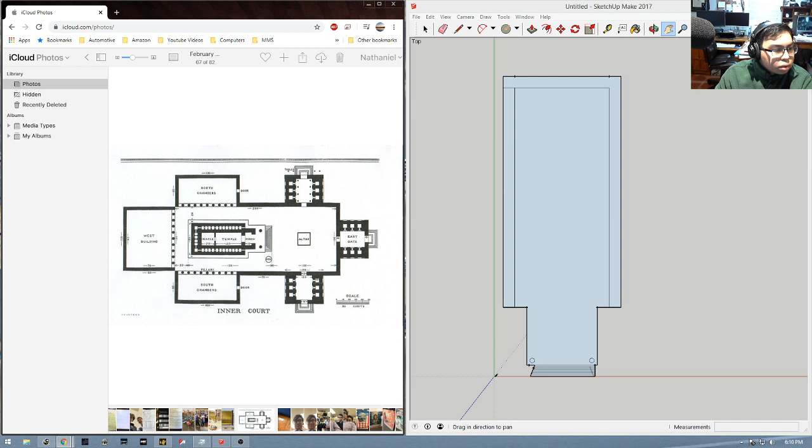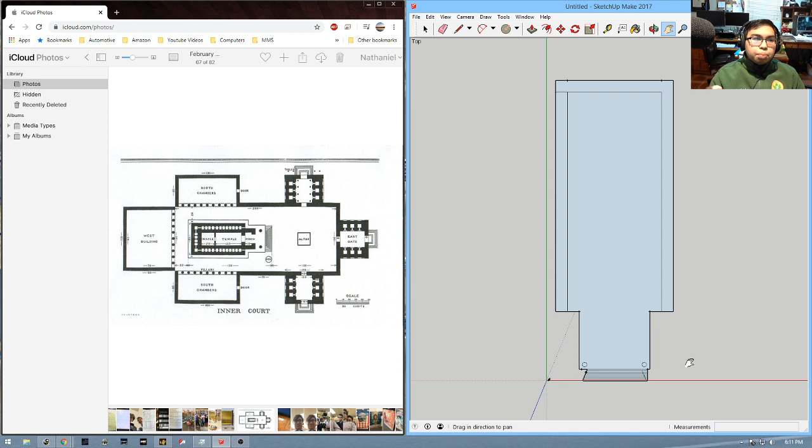Right now we have the current basic layout that I'm using for my model. You can see we're actually pretty far in the process of getting the basic blueprint out, so it really depends on where you stand on your model right now.

It also depends on how much you know about SketchUp and some other stuff. So let's start there. SketchUp is a very easy program to understand and comprehend, which means it won't take that long for you to get to grips with it, and once you do, it's pretty easy to do.

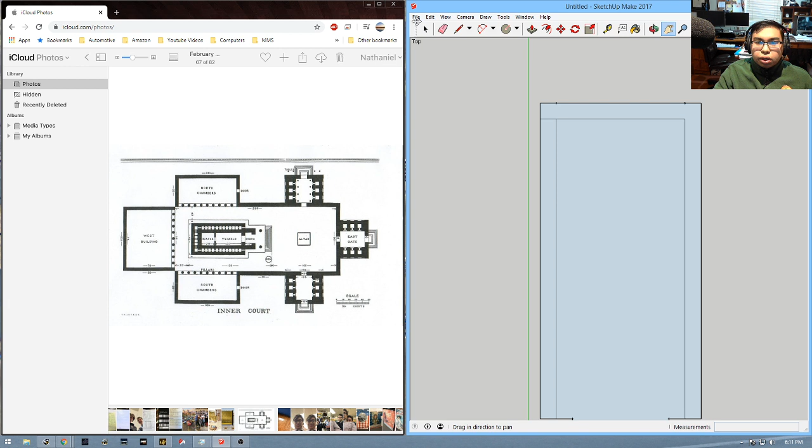What we want to do is get a little bit familiar with our controls first. When you start off with any new document or layout, I'll create a new one for us so we can start from scratch.

When you open up SketchUp, if you're using SketchUp Web, which is the program you're probably going to be using for this class, it's going to look a little different. Don't worry about that—the controls have just been moved to this side and to this side. Otherwise it's stayed pretty much the same.

Okay, so we have this. This is our blueprint that we're going to use to understand how to build it. We're only interested in this small section here where my mouse is scrolling. I'm not sure if you can read the measurements, but I can, so we need to convert this from cubits to inches, into feet, which isn't that difficult.

And then after that, we need to start laying out the blueprint.

First, let's get familiar with our camera controls. On SketchUp Web, you'll get a button on the far bottom left that looks like this, with a rotational orbit look. If you click that and use your mouse button, you can scroll around and look around in your 3D environment. It's very helpful, very handy.

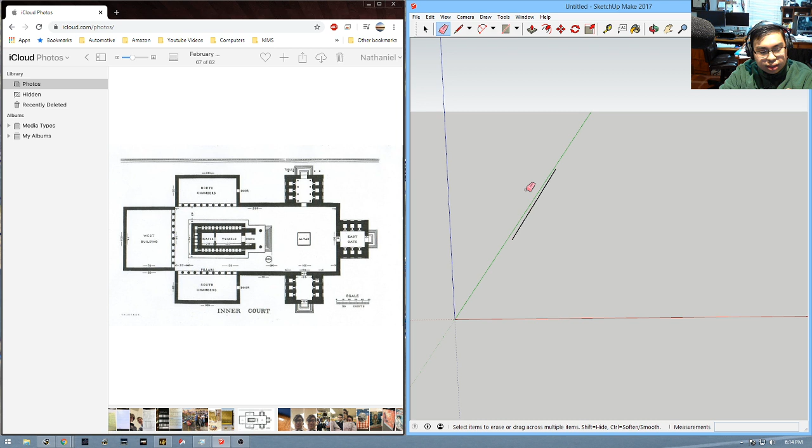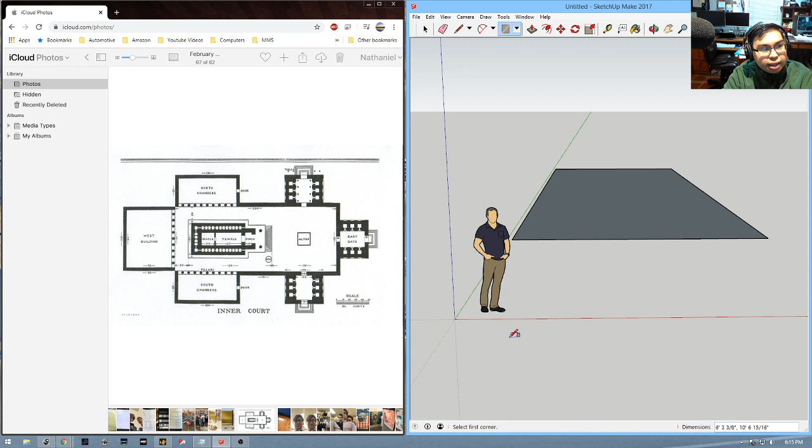Also know that there are commands you can use on the keyboard to make things quicker and easier. For example, if you need to jump to the rectangle or shape builder immediately, just press R on the keyboard, and you can see it jump to that tool so I can build shapes again. Press Control+Z to remove something, or Command+Z on Mac—press it like this and it'll erase the thing immediately.

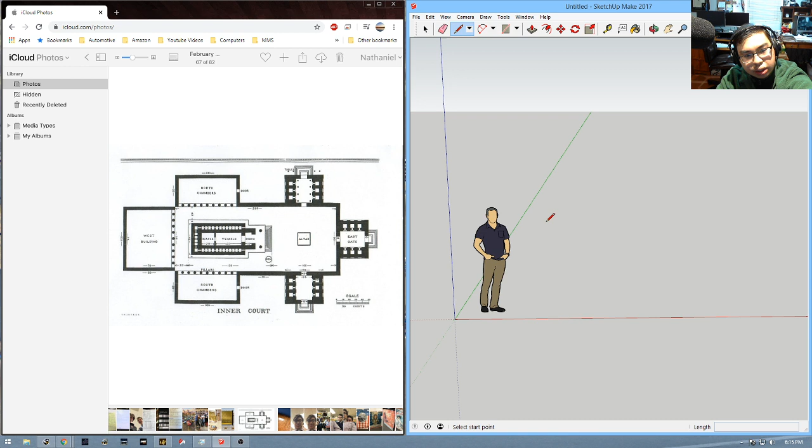Now we're going to start building the temple. How does that work? We're going to press the line button, or press L on the keyboard. Now let's look at what we have here. Let's pull up a calculator just to make our lives a little easier, and we're going to show you what needs to happen.

It says right here that from end to end, using these references from the end of the actual building to the beginning of the building itself, it is 130 cubits long. So if it's 130 cubits long, we multiply 130 times 18 inches to get the measurement in inches. We know that 130 cubits is 2,340 inches long. Then we divide that by 12 to get the foot measurement, and we get 195. So we know that's going to be 195 feet long, and that is the length of the building itself.

So what we'll do now is close that and open this up. I do not remember how it works in SketchUp Make, but I think there's a feature where you just go to Camera, Standard Views, Top, and that gives us a top perspective view of the model. Excuse me a sec. Hold on. Better. And we are going to use the pan tool, and we're just going to zoom out a little bit.

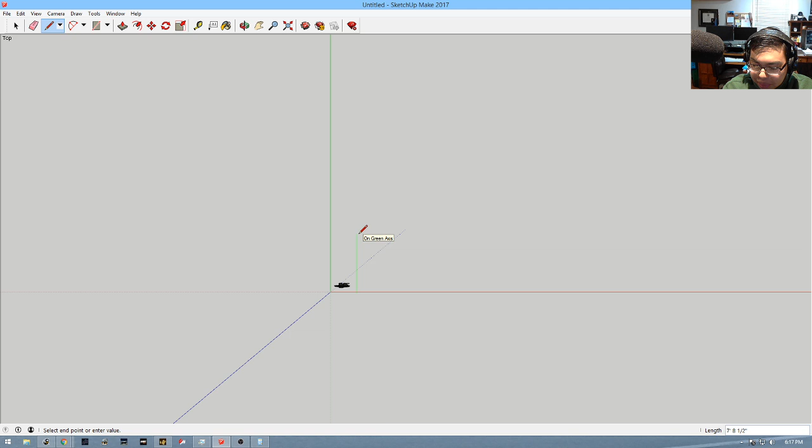Now, by doing so, we'll take the line tool and start on this red line here, which is your x-axis. Click where you want to start, and you'll see this green line occurs. It says on green axis, and on the bottom right there's a thing that says length. What you want to do is go to your keyboard and enter the foot measurement into this length field. It'll do that automatically once you enter keys.

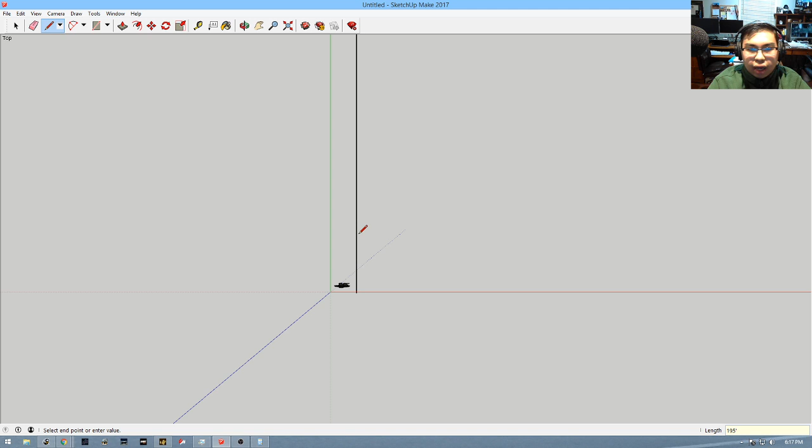So you just press 195, and for feet, we use a single quotation mark, and click enter. Right there, it builds you your first line, and as you can see, it's 195 feet. So that's your first thing.

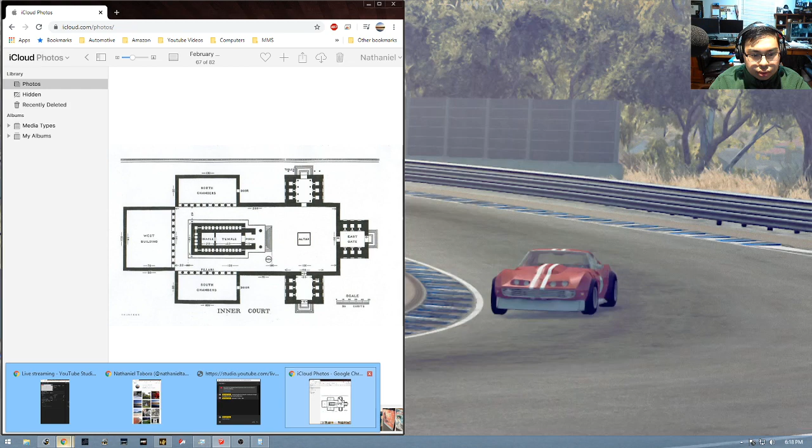Now we need to find out how wide the building is. So we're going to go back to our model here, pull this up, and we see here that the measurement they give is 50 cubits long. Again, if we pull the calculator and clear that out, we do 50 times 18, 900 divided by 12, that gives us 75 feet. So we know that it's going to be 75 feet wide.

Go back into SketchUp, and from here we're going to go to the top of the line you drew there. It says endpoint. It'll mark it like that, then draw onto the red axis, and you enter 75 feet like that. It's very, very simple to do.

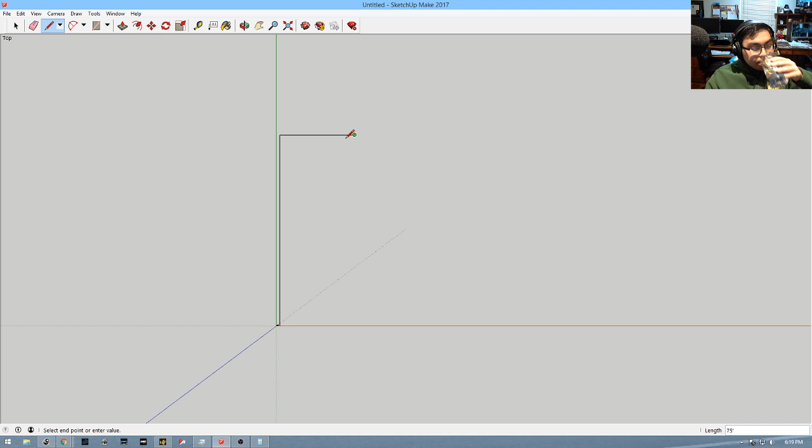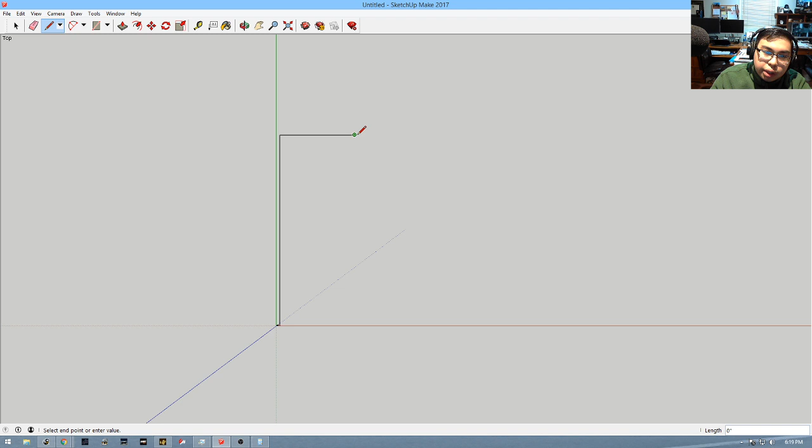Okay, so while I'm waiting on that response, we're going to continue. Since we just need to make a square, like the first primary square here, you can see that this shape was a rectangle and then bits of it were shaved off. It's very simple. So what we're going to do is just make the initial square. We'll go back into SketchUp and finish the polygon, and you'll see that it'll snap to grid, which is great. That's what you want.

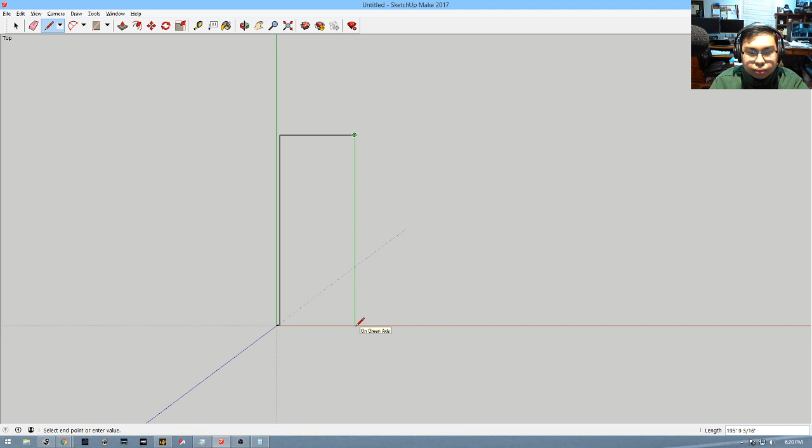Also, if you want to cancel the thing you're doing, say you click something and you don't want to do it, what you can do is just press the escape key on your keyboard and it will cancel that command for you.

That's very helpful. So what I'm going to do is zoom back in here, and we're going to click the endpoint there and just drag it, and it's going to tell me now that it's from point. So you want to click it from point, and there we go. That's our first rectangle, or bit of the 3D model that we need done. Excuse me a second.

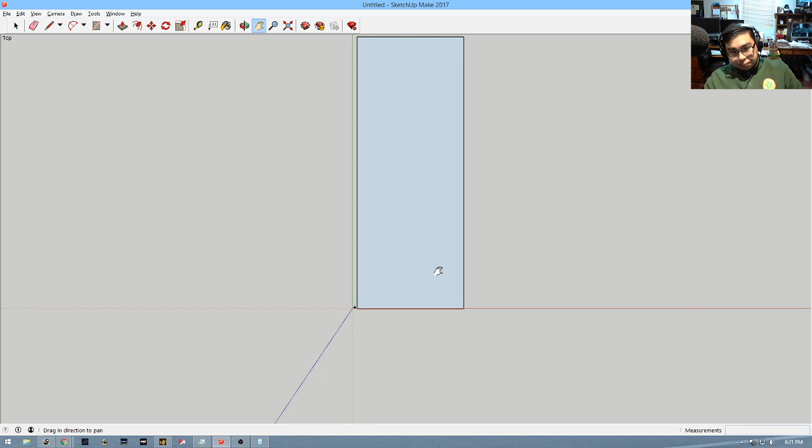Okay, now since we have made our first polygon in the model, we can take a look at what we are doing. Remember, this is from the top view. If we want to look at how it looks right now from a 3D perspective, you can see it really is just a very large rectangle. But from this, we're going to build the temple, and that's what's brilliant about this whole thing.

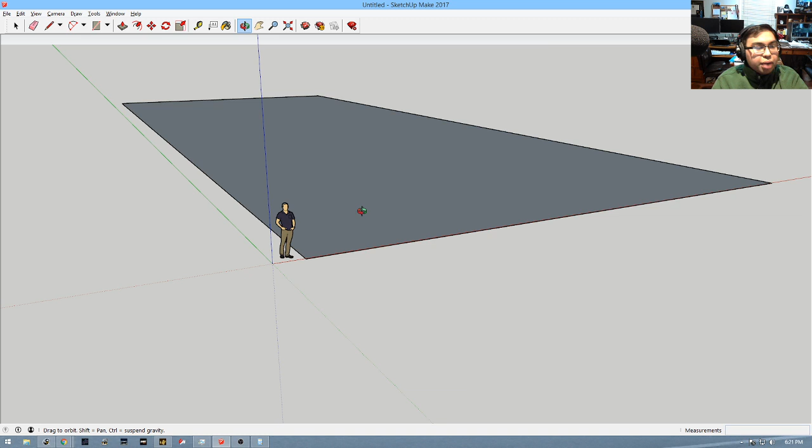So we're just going to go back to camera, standard views top, zoom back out, pan a little bit so we get a better view.

Now what we need to do is take a look at how thick the walls are in and around the actual temple itself. So we go back to our 3D blueprint here, and we can see there's an outline where it is wall or the outer perimeter, and that's going to be most helpful when we are making the walls, as well as finalizing the rest of the model itself.

So what we can see here is that, roughly, this is about 5 cubits thick. From what I can make out there, that is a 5, showing us how thick the wall is. So we know it's going to be 5 cubits. That's how many cubits we're going to need.

So let's go back into SketchUp, pull the calculator up, and calculate how much that is in inches. So 5 times 18 divided by 12 gets us 7.5 feet.

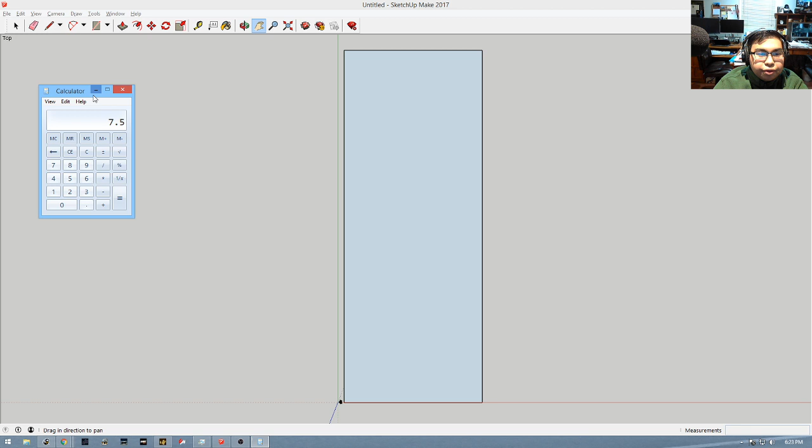So there's a feature in SketchUp which is very helpful that we're going to use to help us measure the walls. It's called the measuring tape. Right here it's the measuring tape tool, you'll see it in SketchUp Web when you use it. We're going to click it, and this allows us to measure and make lines without actually setting them in the model itself.

That becomes very helpful as the model becomes more advanced, because the more lines you draw, the more polygons you make, and if you make a wrong polygon, things are going to go horribly wrong horribly quick. So we use the measuring tape tool to help prevent that and still get measurements and starting points to allow us to model.

So what we'll do here is start from the point, from the very top end point here. We'll assume this is the back, considering the person is down here - this is the person. So this is the back of the model, and we know we need to go 5 cubits wide, which is 7.5. So we'll go into the length box here and just enter 7 foot 6 inches, because that's 7.5 feet. Click enter, and you'll see a little line has developed right up there - that's our first measurement.

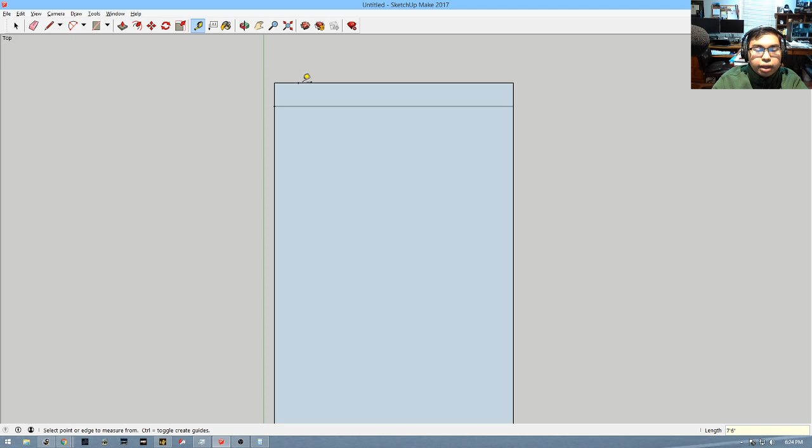So we'll take note of how thick the walls are. We'll take our line tool and draw that across, and measure out again another 7.5 - 6 inches right there. And we'll draw that line.

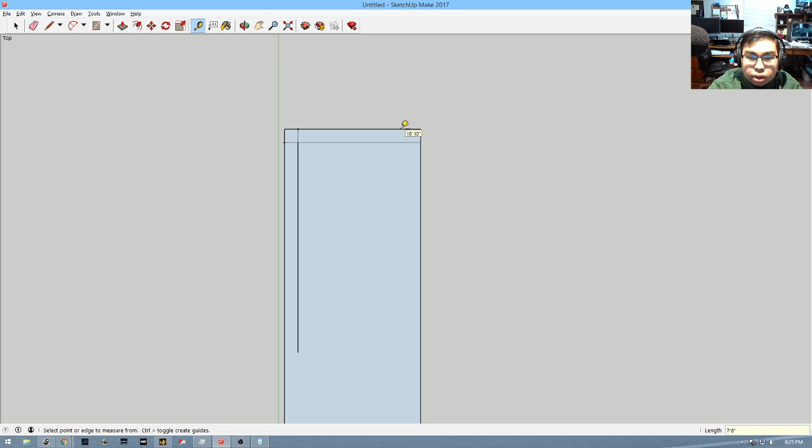And if we go to this - there we go, we'll do 7, 6, there you go - line tool, and just draw it. It doesn't need to be exact yet because we haven't gotten those measurements, but we're just trying to build the walls.

Then what we'll do is pan in, and now we can remove these extra lines here because we won't need them anymore, since this is one continuous wall. That doesn't mean we need to keep these parts. So we just go to the erase tool, click E, and drag your mouse around it - you can highlight it, see how it turns blue, let go, and all of a sudden it's gone.

Same thing here. And now we have the walls to the temple.

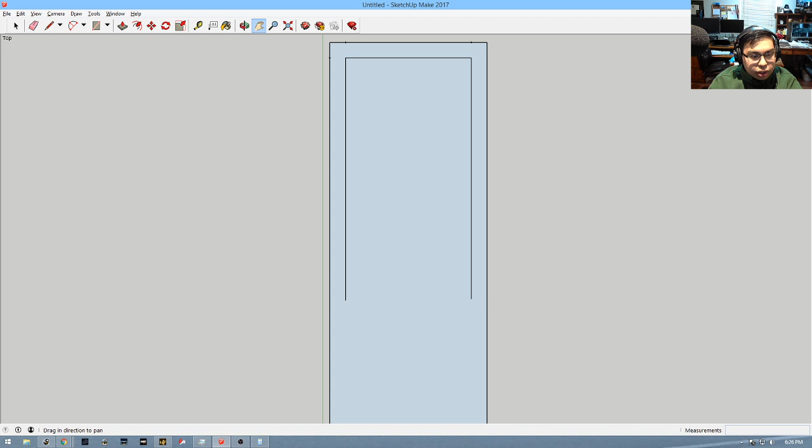So that's good. Now what we need to do is go back to our model and take a look at the rest of it. We can see this goes - we're going to have to guesstimate here roughly. I'm going to say that from here we have about, let's see, what does the model tell us?

It's about 30-ish cubits from where this porch portion ends to the end of the stairwell. So roughly about 30 cubits. Let's pop that in here.

We'll do 30 times 18 divided by 12, which gives us 45 feet. So we're going to go back to the bottom where it starts, and measure out 45 feet roughly. There, you'll see it's drawn us a line here, and we'll take that line and draw it across the polygon. There we go, and we can extend these lines there.

And just like that, we've now built the inner cage for Solomon's Temple. That's excellent. So right over here is the porch and the stair column, and then in here is the innermost section of Solomon's Temple.

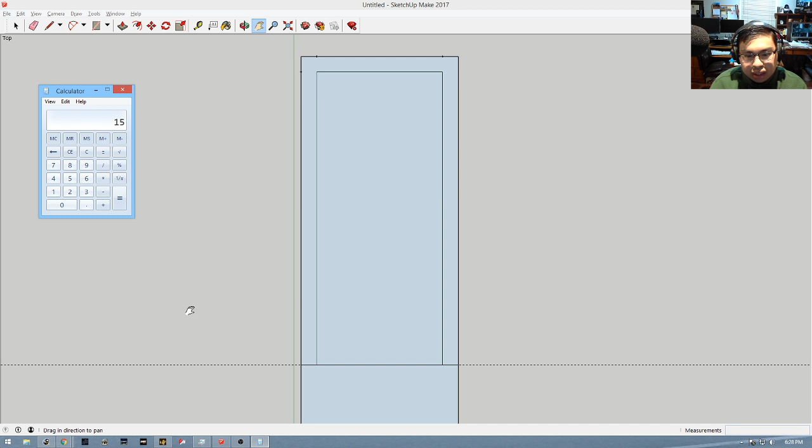So we'll go back into the model, pull this up, close this up, 10 cubits, so 10 times 18 divided by 12 gets us 15 feet. So we know that it goes in 15 feet from this line here.

Let's erase this line here, because that's just a measurement we don't need anymore. Pan in, and from here we'll go back to the measuring tape, and now we measure 15 feet in. So 15 there, like that. Oh excuse me, not 15 inches, 15 feet. There we go, and we'll do the same here.

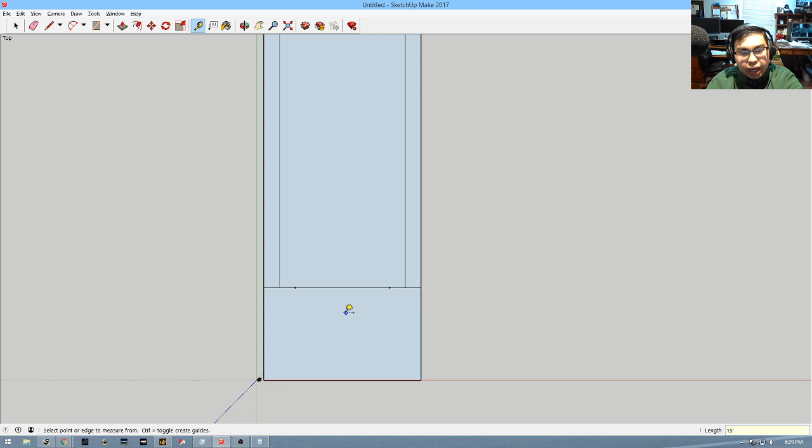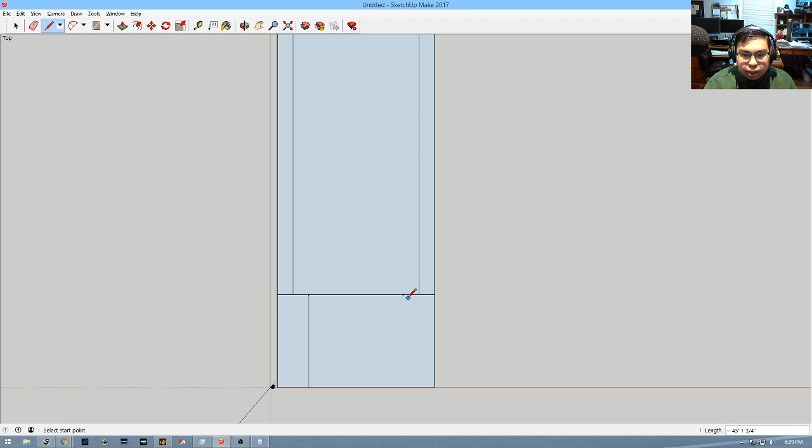So now we have the rest of the basic layout here. Now we need to draw a line from here to the end of the stairwell, and the same thing here. Now you can see there are what appears to be 1, 2, 3, 4, 5 different shapes. With those 5 shapes, we will start building the Solomon's Temple part.

So now let's focus more on this side here. Since we know these two 15-foot parts are no longer needed, we can delete them, just like that. And now you can see within the model, we have a basic layout.

And if you look at the photo we're using to base it off of, it's starting to look a little bit like this part here. So that's good, it means we're getting places.

Now we're also going to assume that the stairs were roughly about 10 cubits wide, or 10 cubits deep, so we'll estimate that, and then this was about 20 cubits here. That seems about a proper estimate.

So what we'll do is build a line. Let's pull the calculator up again, clear that, and let's get our estimate. So about 15 feet. We go to here, and 15 feet. So that's where the stairs are, so we can draw a line.

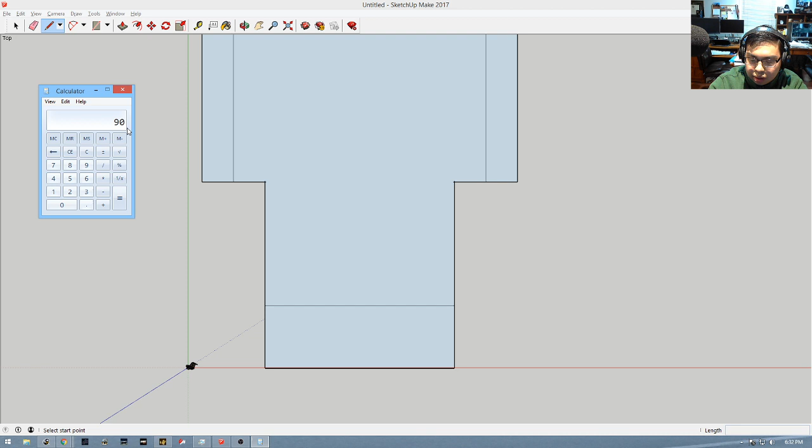and we can assume that that's about 5 cubits. Now this wall, since it is a surrounding wall, we need to make sure that that's about 5 cubits. So we need to erase 5 cubits from the model of this wall here. So we'll delete, and we'll go 5 times 18 divided by 12 gives us 7.5.

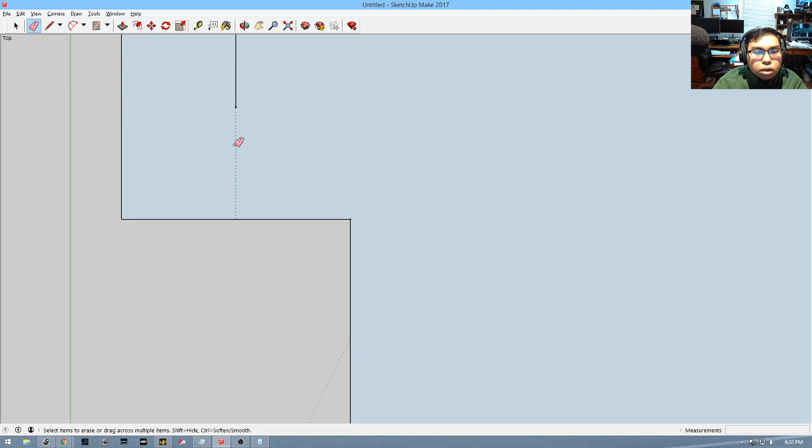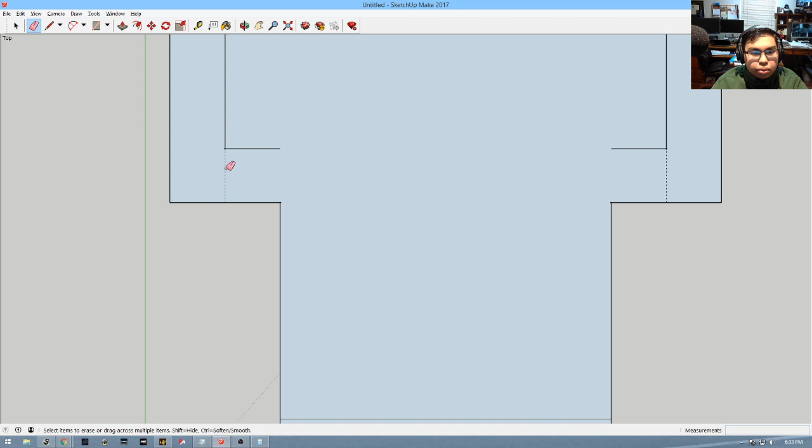Okay, and then we need to draw the line to this point here and to this point here. And we should be able to—nope, maybe not. Sometimes the measurements will stay, that's fine. And now we have the actual bit of Solomon's thing there. So now we need to do the stairs, and the stairs are going to be pretty simple.

What we need to do is find out that it was roughly, I think we estimated, 10 cubits. So we take that, clear this out, and we'll do 10 times 18 divided by 12. That's 15 feet. So we know there's 15 feet. We can assume there's 9 steps leading up to the temple, which means we need to do 15 divided by 9, which gets us 1.66 feet roughly per step, which means we need to convert that to inches.

Okay, that's pretty simple, so we just need to measure out 9 divisions of 20 inches. So we'll start on the stair axis here, go 20 inches, and we just do that roughly 9 times, like such. Okay, and if we just count that, that should be 1, 2, 3, 4, 5, 6, 7, 8, 9 divisions.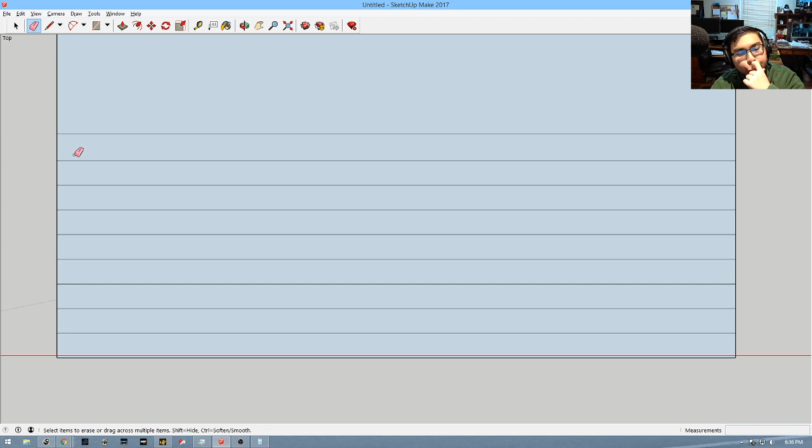And we'll go back to the model, and we know that we need to start from the top and go in because it is a concave step. So we start up top and go out from there. So let's go to our measurement tool, zoom in, start from the top, and measure—hold on a second, let me just compare this to my baseline model that I'm using.

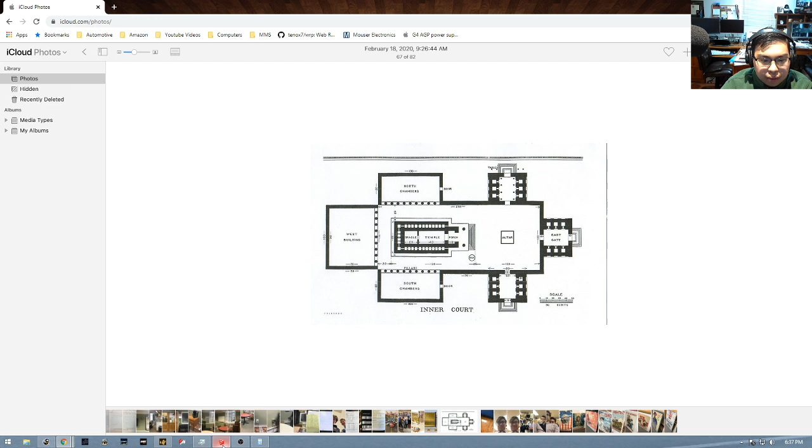Oh, and again, if we just want to look at this from a large scale, we can start to see the temple actually starting to take place, and it's starting to look now like a temple. So, let us find out.

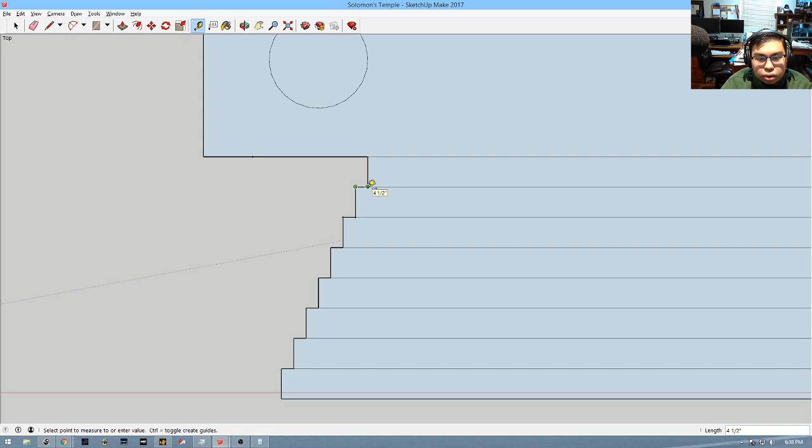4.5 inches. 4.5 inches. Excuse me. So, 4.5 inches. And yes, it's really that small.

I'm just going to do this 9 times.

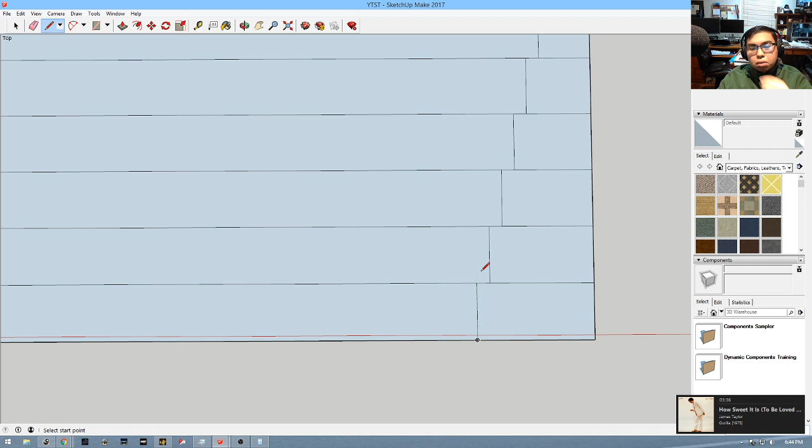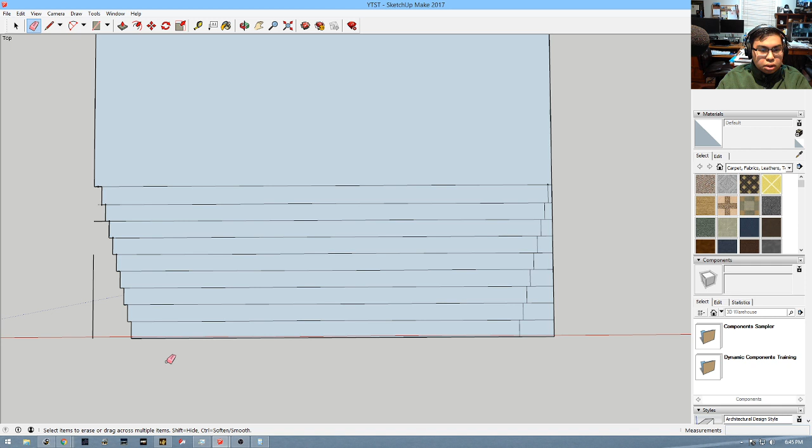Now I'm going to take that and erase some bits here. And if I just pull the top view here, you can see all of a sudden, if you squint just a little bit, it's really starting to look now like an actual building. And that's good—that means we're making progress.

Okay, now what we'll do is start with the columns. So we'll take our rectangle tool, press R, and to change it to a circle tool you press C, and all of a sudden you can see it's switched over. And we will go back to our model and just check what it looks like.

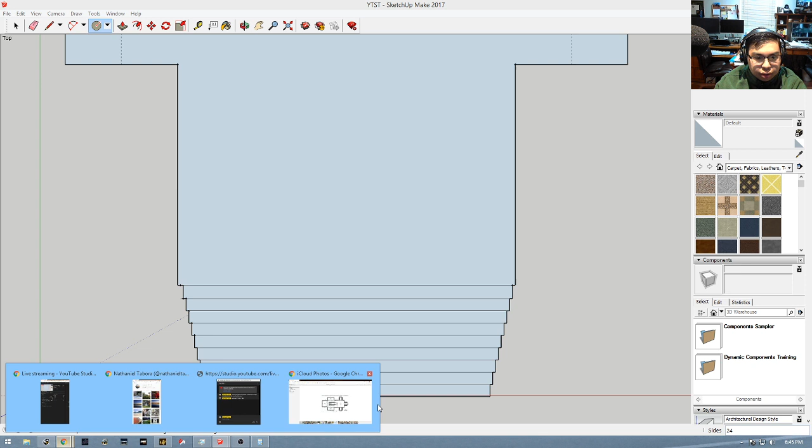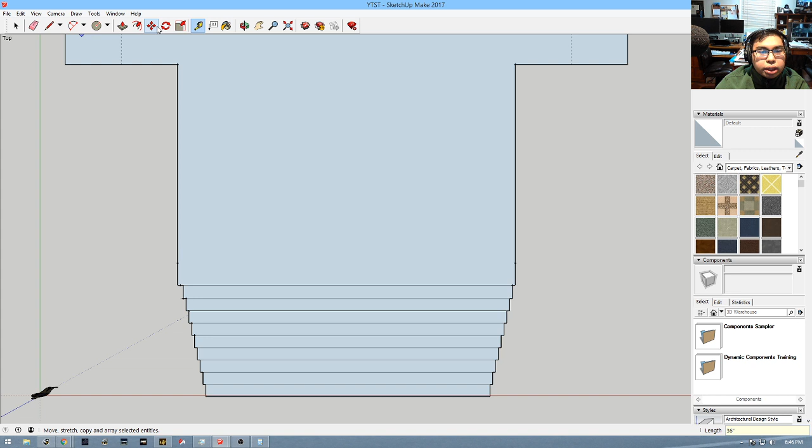And we can see here, let's estimate roughly about 2 cubits, so about 36 inches away. We will do 2 and 2, so 36 inches from each side. So let's take our measuring tape, go to this edge here, measure 36 inches, right there, same thing here, and we will take our measurement tape again, start from that point and go 36 inches, and here, same thing.